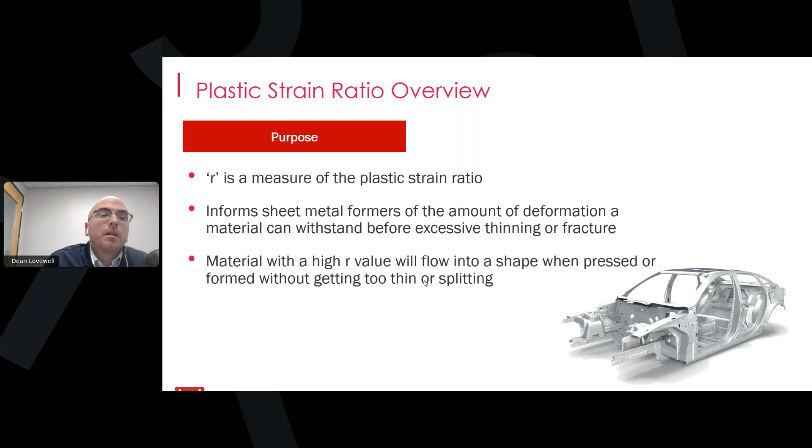R value is determined from a tensile test, the same type of test used to determine other properties like yield strength, tensile strength, and elongation. One notable difference, though, is that the formula used is based on true stress and true strain data.

In practice, we almost always view and discuss tensile data in terms of engineering stress and engineering strain. This distinction matters because while engineering strain is based on the specimen's original dimensions, true strain accounts for the continuous reduction in area that occurs as the material deforms. Similarly, true stress uses the instantaneous cross-sectional area, giving a more accurate representation of the actual load-carrying state of the material.

The reason R value must be determined from true strain is that it specifically represents a ratio of instantaneous plastic strains in different directions, which evolve continuously during deformation. When setting up R value calculations in Bluehill, you don't need to make any adjustments for this difference. Our software automatically converts the engineering stress and strain values directly to the true values used in this calculation.

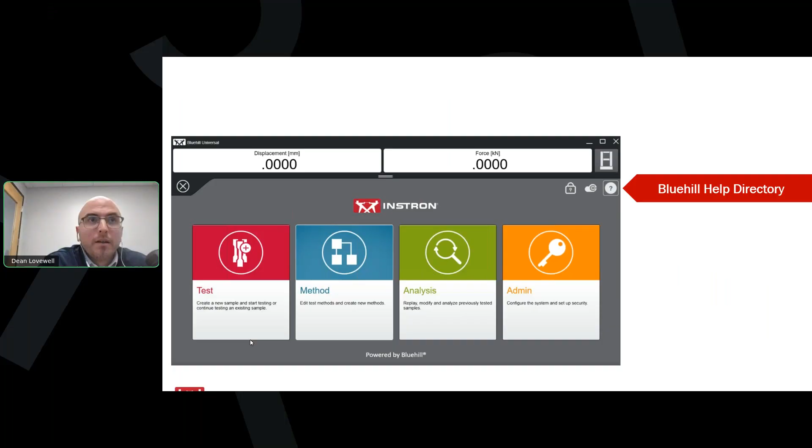These calculations can be confirmed by referencing the Bluehill help file, which you can navigate to from any Bluehill screen. These formulas match the requirements of the common industry standards, and they're particularly useful anytime you need to discuss how a particular material property was calculated.

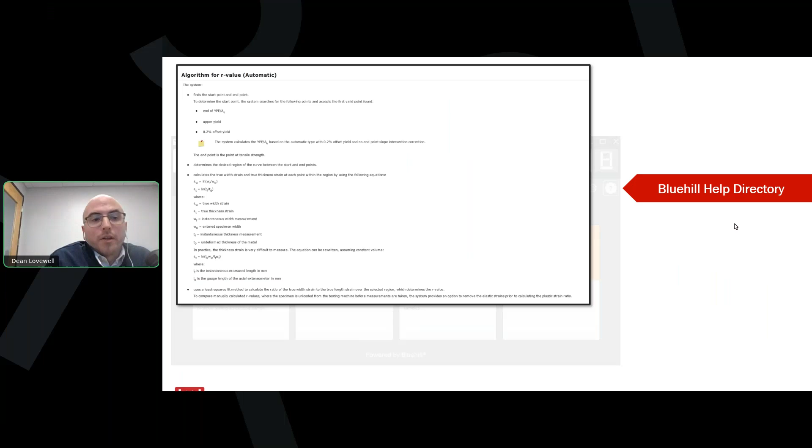One key area addressed in the help file is the question of elastic strain, as both ISO and ASTM require that we remove elastic strains in the determination of R value.

This is really important because, as I mentioned, this is the same tensile test where we're determining tensile strength and elongation. So we're also expecting the test to proceed beyond the range where R value can be determined. This means that we need to automatically subtract these elastic strains during the test. When creating a method with a template R value, this is automatically factored into the calculation.

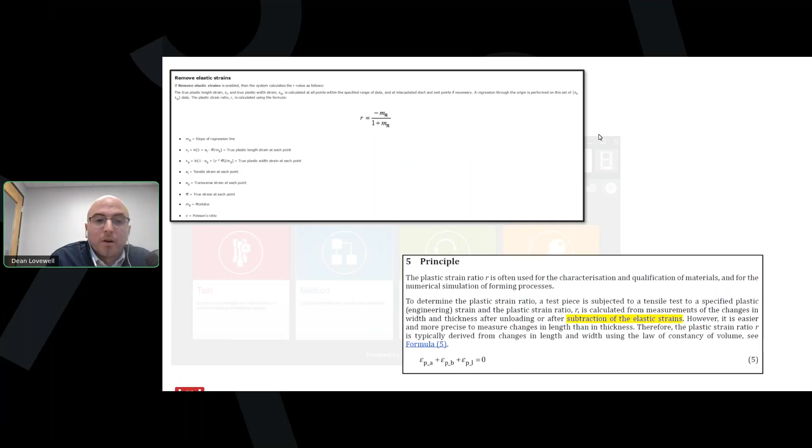However, our flexible software also allows you to build your own R value, in which case you want to make sure you enable the remove elastic strains toggle switch if you're planning to follow the standard for that test.

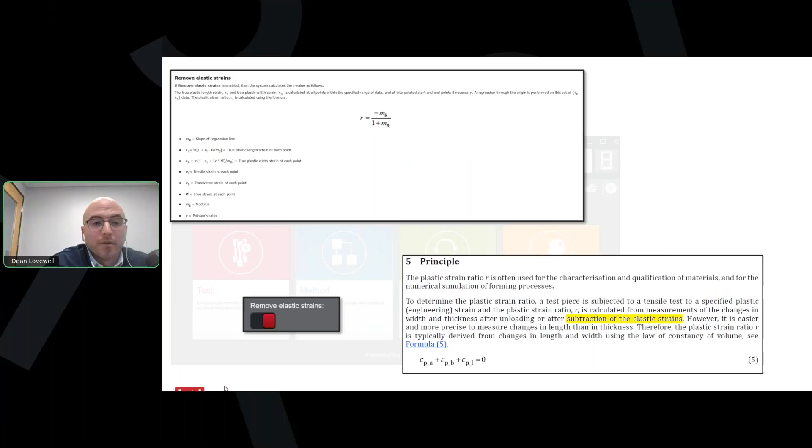Getting back to the calculation, we're measuring how much the specimen's width changes compared to its thickness as it's pulled in tension. This ratio, the width strain divided by the thickness strain, defines the plastic strain ratio.

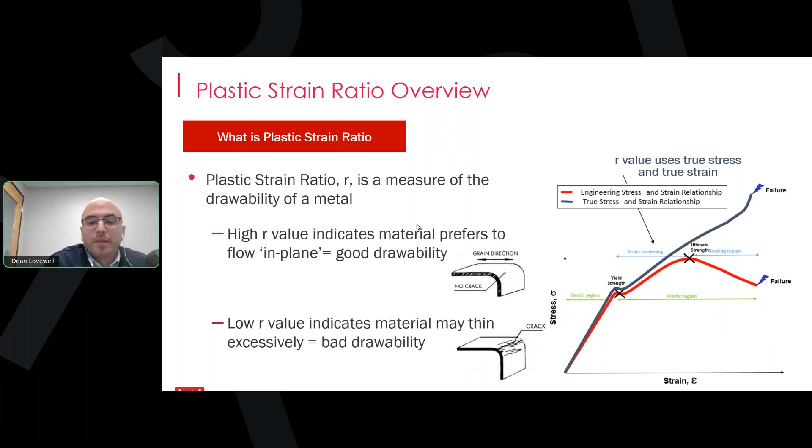In automotive sheet metal, R value is one of the key parameters that tells us how well a material will perform in deep draw or stretch form applications. Understanding and accurately measuring it helps manufacturers predict formability and update their processes.

As you could guess from its name, the plastic strain ratio is determined during the strain hardened region of the stress strain plot. During this part of the test, dislocations within the metal are moving, and as they move, new dislocations are being generated. The rate at which a metal can create and store dislocations, and thus the extent to which it can strain harden, is directly dependent on its microstructure, which is itself dependent on the composition.

This is why some alloys exhibit PLC, some don't, and some only do under specific conditions that lead to a PLC-affected microstructure. One of the reasons why 5000 series alloys are really well suited for automotive structural applications is because their microstructure enables a lot of new dislocations to be generated during plastic flow. This enables them to be significantly strengthened during cold work.

6000 alloys, on the other hand, flow much more continuously. However, while the magnesium in 5000 alloys is in solid solution and able to flow, the magnesium in 6000 alloys is tied up in magnesium silicon precipitates. These precipitates impede the movement of dislocations as well as the creation of new ones. This explains why 6000 series alloys aren't really suitable for applications where a lot of strain hardening is needed to meet final properties.

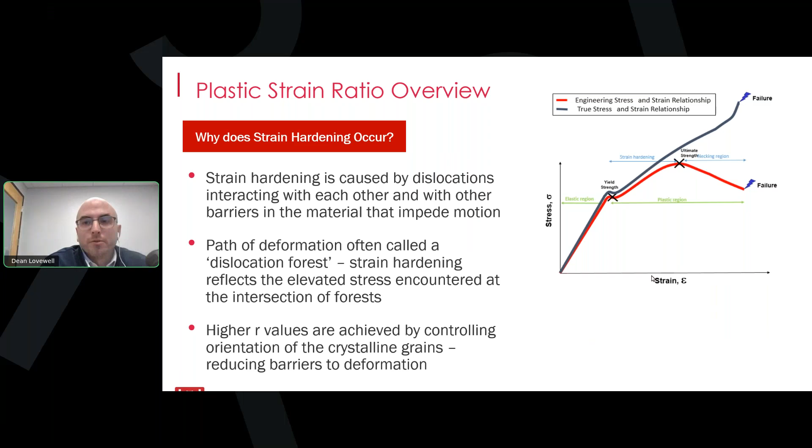The two most commonly used standards for determining R value are from ASTM and ISO. ASTM E517 was originally published in 1981. The normative reference for this standard is E8. By normative reference, I mean that the testing performed to this standard follows E8 in every way, with only the necessary requirements to measure plastic strain ratio included in this document.

This means that for test control methods, specimen dimensions, terminology, really anything besides plastic strain ratio requirements, your lab should refer to ASTM E8. The committee responsible for this standard is E28.02, called the Subcommittee on Ductility and Formability.

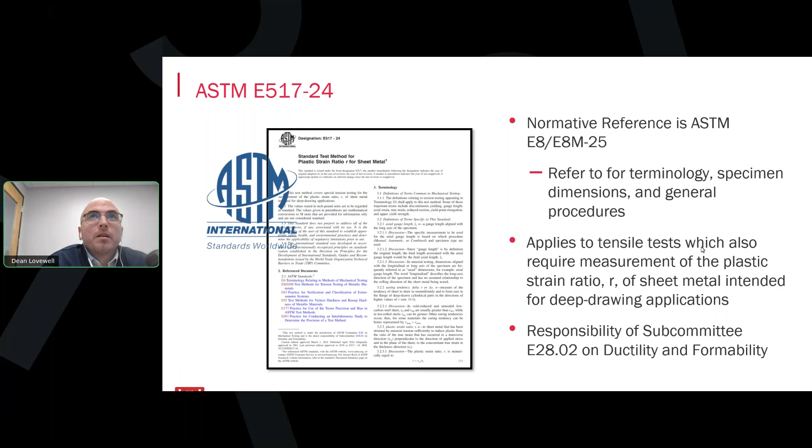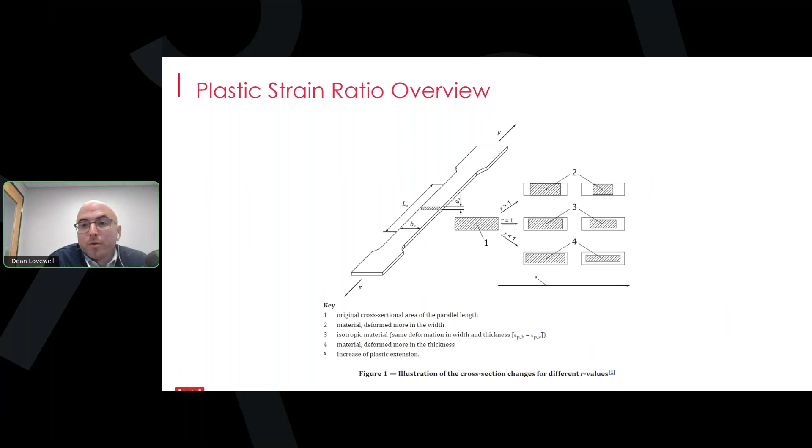In the middle, where R equals 1, the width strain and thickness strain are about the same. Here, the specimen deforms uniformly, both in its width as well as in its thickness. Then down at the bottom, where R is less than 1, this material would spread much less, as it deforms preferentially in its thickness.

Now, this diagram from ISO 10113 -- sorry, that was a previous slide. So as I mentioned, R value is determined during the strain hardened region of the test, after all yield properties have been determined, but before the onset of necking occurs, immediately after tensile strength.

The reason why we don't calculate R value from the portion of this curve after tensile strength is because the formula for R value assumes that the width strain is relatively homogeneous throughout the reduced section. After necking occurs, width strain is localized to the position of the neck, so the formulas we use don't apply.

Now, R value can either be reported from a single location, for example, when tensile strain equals 10%, or it could be calculated over a range like 15 to 20%. The specific requirement here is typically determined by the metal former, as they'll want to know the R value over the expected strain domain used in the manufacturing process.

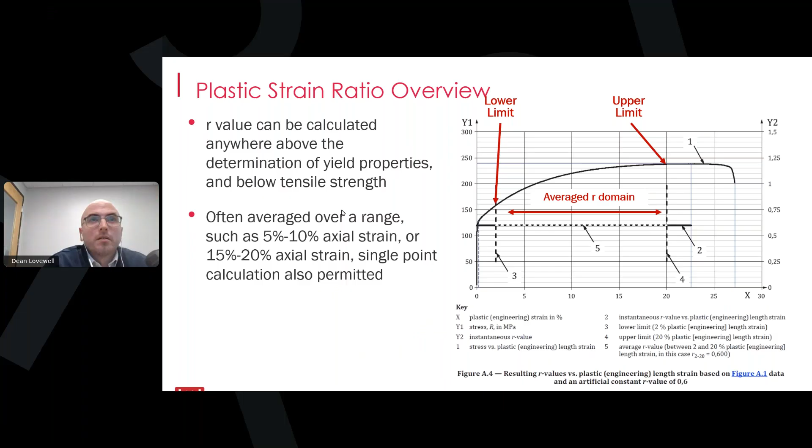Now, the important takeaway that I really want to emphasize here is that once tensile strength is determined, so the maximum force has occurred, and after which you have the onset of necking, we can no longer use the R value formulas from ASTM and ISO. This is because the resulting width is no longer reflective of the width of the reduced section, since after necking, all of the width strain now occurs where the neck has started.

So we see 3 different stages of the test here. On the left, we have a specimen in the elastic region. The strains in this region will be automatically removed for the Bluehill calculation of R value. Then we have the strain hardening portion of the test, showing where B sub 1 would be measured. And then the final specimen on the right, this is post-tensile strength determination.

We see that some necking has developed, and we know that as the test proceeds from here, all of the width strain is going to occur where that neck is. So whether the arms would happen to be at the location of the neck or elsewhere, it's still true that the transverse strain that they are measuring is not representative of the gauge width.

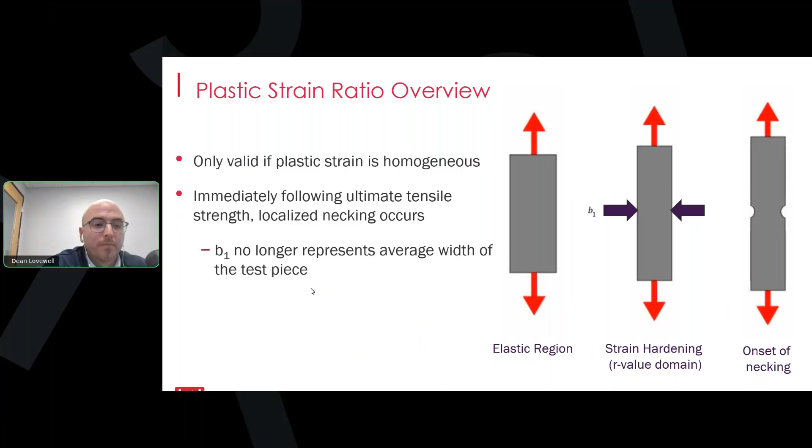So that was an overview of what plastic strain ratio, or R value, is and how it's measured. Now let's look at a material that really complicates our determination of R value.

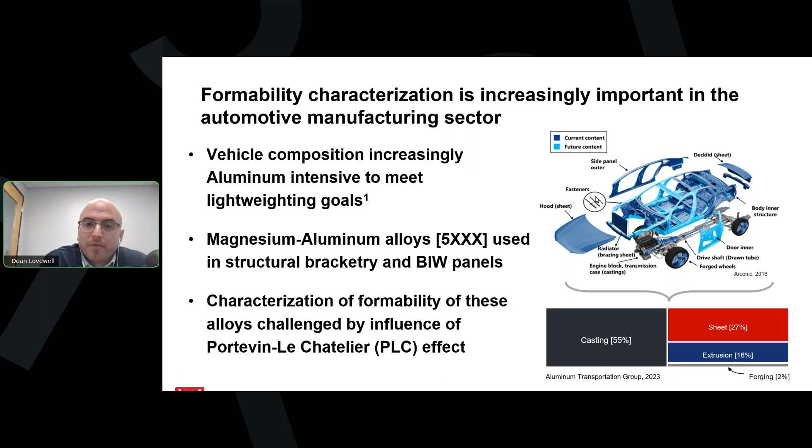One of the trends that we've seen in automotive sheet is a transition from easily formable alloys to more complex alloys capable of achieving higher strengths in thinner cross sections. This includes the transition from interstitial free steels to advanced high strength steels, which I'll touch on at the very end of this webinar. It also includes an increasing shift to aluminum sheet.

Now, aluminum is lighter than steel, and it adds some additional corrosion resistance, which is a really nice benefit for us here in Massachusetts, faced with both the salt from the ocean and the salt on the roads. But it's not without its challenges.

To achieve the strength requirements for structural bracketry and body in white panels for automotive applications, aluminum is alloyed with magnesium to form a 5000 series alloy. This family exhibits serrated yielding behavior as they strain harden, and this behavior is called the Portevin-Le Chatelier effect.

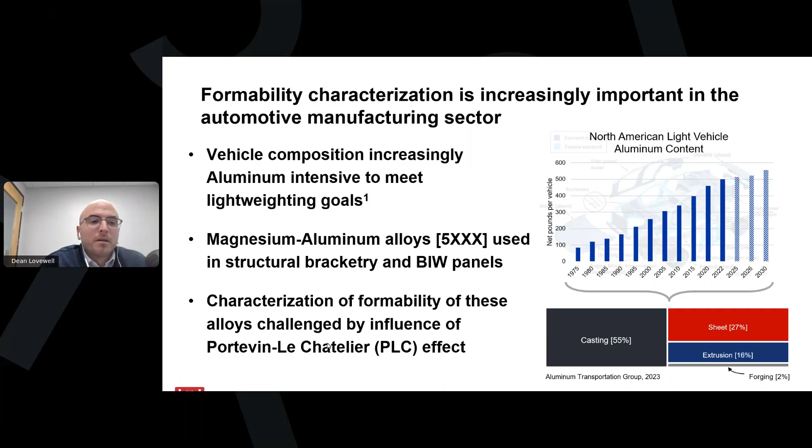Now, the Portevin-Le Chatelier effect reveals itself just after yield, and in this 5182 aluminum, it continues all the way through tensile strength. Since this is the region where formability is characterized, it introduces significant variation to the calculated result, depending on which points are included in the calculation.

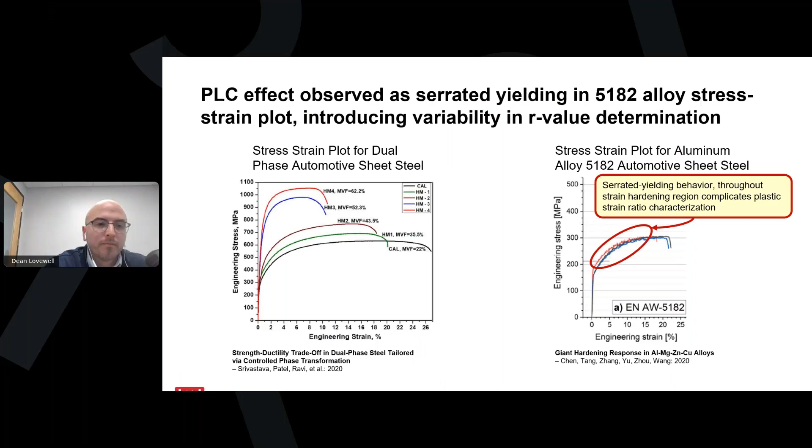Like I mentioned earlier, metal formers generally want a higher R value because it means they can get more draw out of the same material. Having a higher R value means the former will not only be able to obtain the shape they need, but it also means they'll benefit from the strengthening that occurs from the cold work used to achieve that shape.

During tooling design, the R value along with the finished geometry will both be considered for how much work can be done without risk of excessive thinning. For this reason, it's important that the plastic strain ratio falls within a defined window. Non-conforming material, of course, risks being overworked, which can lead to cracking, or underworked, which would result in insufficient work being done to develop the strength desired.

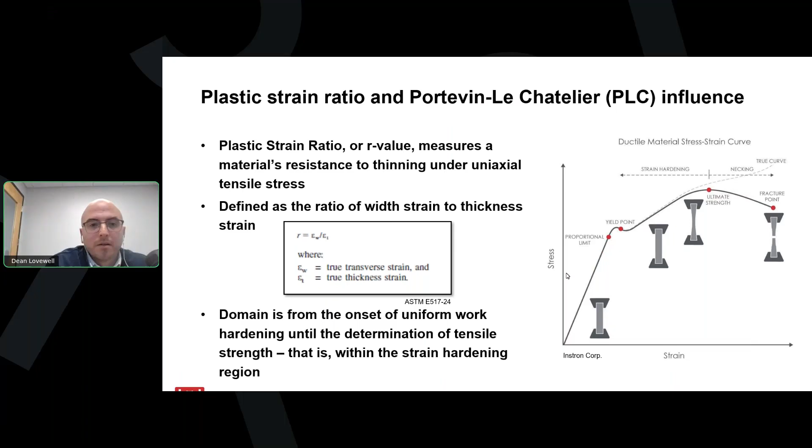Now, although the calculation here defines the ratio as transverse strain divided by thickness strain, testing standards clearly specify that R value is not typically characterized from the direct measurement of the thickness. This is because it would be extremely difficult to measure the change in thickness for thin sheet metals.

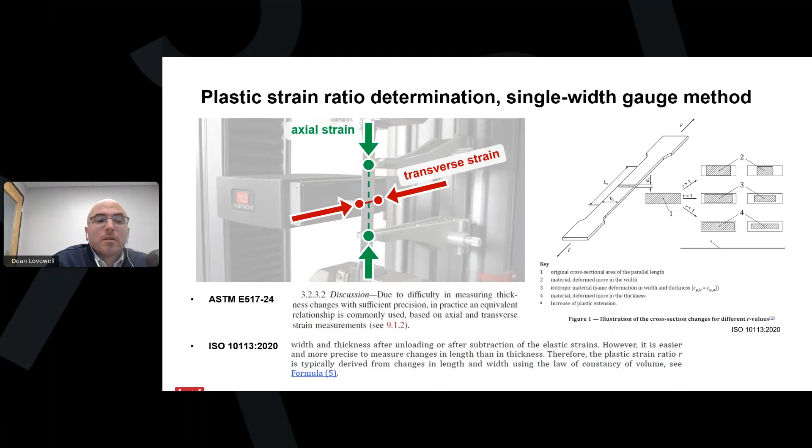Rather, an axial extensometer measures the strain in the length, and a transverse extensometer measures the strain in the width. And by the law of constancy, the strain in the thickness is inferred. This is spelled out in the formulas in ISO 10113, as well as in ASTM E517.

Now, in this visual, we're showing how Instron's automatic contacting extensometer, the AutoX, measures axial strain using the two arms connected to the main unit on the left, and the transverse strain using the smaller arms that meet up with the red dots in this illustration.

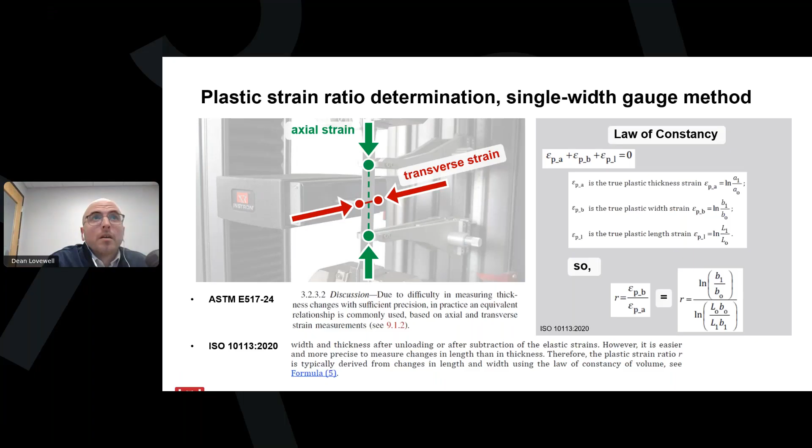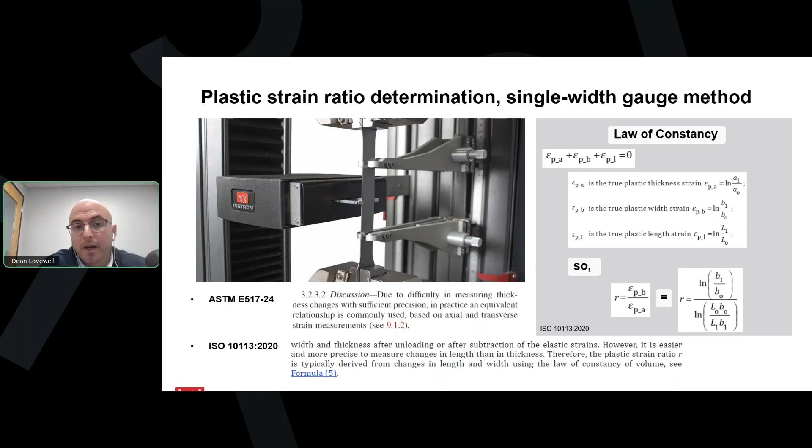You can see that a bit more clearly here if I remove those labels. In non-PLC affected applications, the AutoX with an added-on biax unit is an excellent solution for characterizing formability because its operation is automated, so it's effective at removing the variability that occurs from the less repeatable engagement that you get from a clip-on extensometer.

Now, for materials with stable plastic flow, this method of a single width transverse extensometer is sufficient, since for the domain of the strain hardening region, which we see in this graphic, the width strain is homogeneous. You can see that the area between the green gauge marks reduces uniformly, and so the red dots are sufficient to provide the representative strained width.

And then just another reminder here, you can tell that this is the reason why R values are never calculated past tensile strength determination, since again, after the specimen has received maximum force, it'll neck locally, and those red dots will no longer be representative of the full specimen.

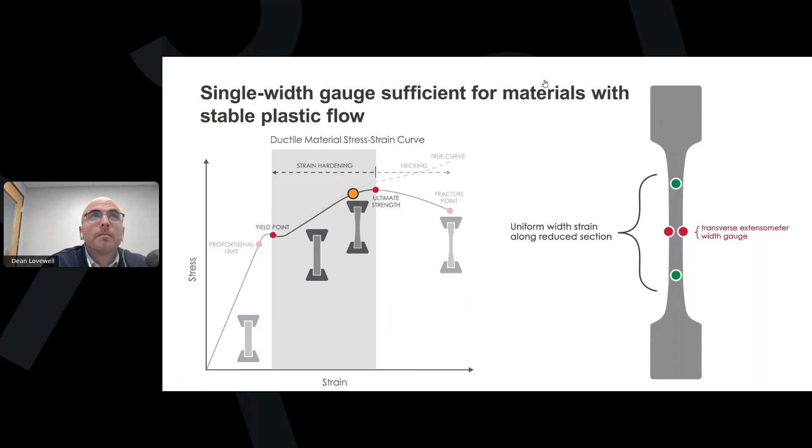So the PLC effect complicates this method by what's observed as jerky flow of the specimen. This jerky flow is the result of magnesium atoms diffusing through the aluminum matrix, pinning dislocation movement in localized regions of the specimen. With dislocation movement pinned, there'll be a rise in tensile stress, and we observe that in the curve.

And that rise continues until the solute atoms become depinned, in which case they flow and the stress is lowered. This occurs repeatedly, and the striations are even visible on the specimen itself. These striations are called Luder's bands, and they represent localized regions of plastic deformation.

What we're seeing on that specimen in this picture is showing the periodic mismatch in surface condition between the regions of localized strain. Now, not only is this bad for surface quality finish, but it also really complicates our formability testing.

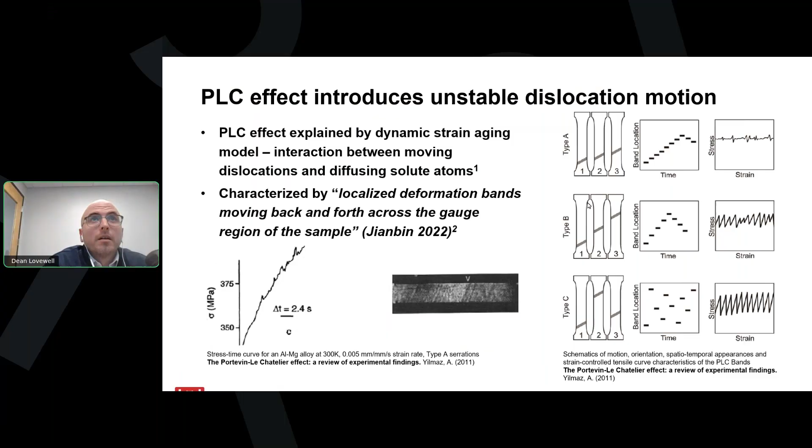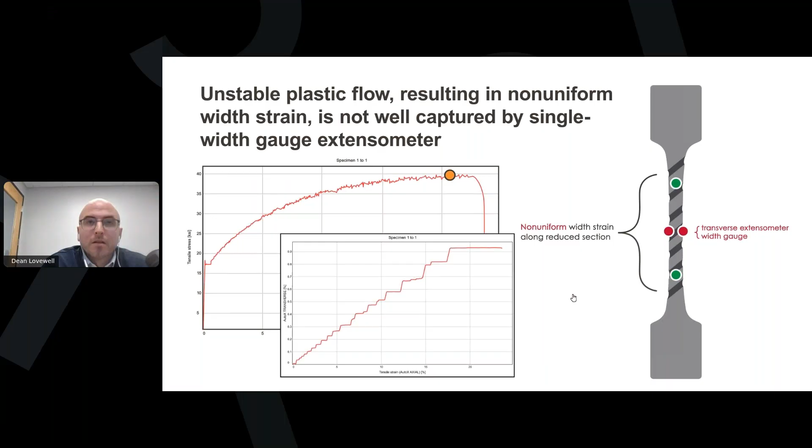they diffuse toward the tensile region of edge dislocations in the metal. Here they pin further dislocation movement until the bondage of those solute atoms itself is broken. Now, while they're pinned, we see the stress rise. And then when they break free, we see what's described as a plastic avalanche of the localized band. At this point, there's a burst in the dislocation movement and the stress suddenly falls.

And then again, as this process repeats, this is what we observe and call the Portevin-Le Chatelier effect, more commonly the PLC effect. And again, the reason why we see this in 5000 series alloys is because the magnesium atoms are in solid solution with the metal, and so they're able to travel until they're pinned.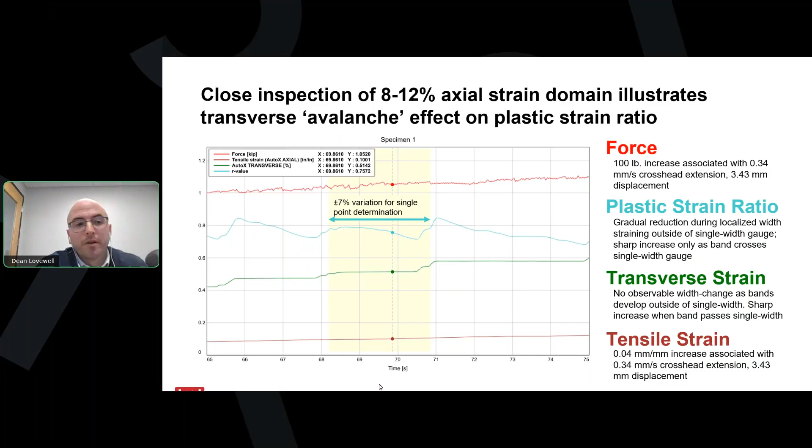And this behavior is consistent across the 5182 alloy specimens we tested. In speaking with producers at the time, we were told that in order for them to ensure they met formability requirements, they essentially had to plan for the very bottom of the range of R value in order to avoid producing non-conforming material or material that required multiple retests.

Now, in order to do this, they would work to lower composition levels of magnesium, although this would prevent them from missing their R value requirements. It meant that they were sacrificing strength to do that. And still, they were delivering material with lots of variation in the certified value.

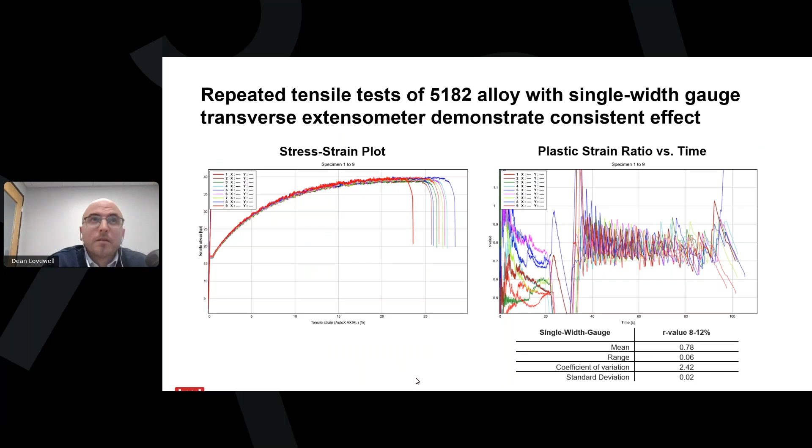Here's a look again at those same tests. We're looking at the contributing axial strain on the right and transverse strain data on the left for these tests. This really demonstrates the consistent unpredictability of the transverse strain behavior that's directly contributing to the variation in our R value. Notice that my plots are all offset so we can easily see how each test progressed relative to the others. This is possible using a simple toggle switch in Bluehill that I use regularly when reviewing test-to-test data.

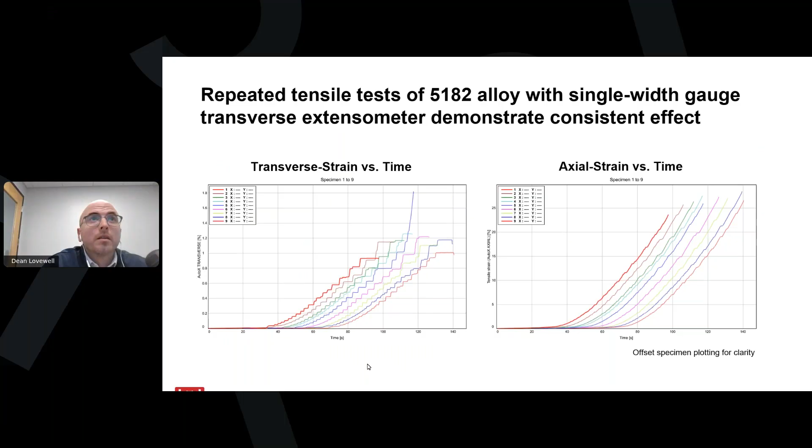For contrast, I wanted to show a similar test done on a 6000 series alloy. Specifically, this is 6063, and it does not exhibit the PLC effect. As I mentioned before, though, it unfortunately doesn't exhibit a lot of work hardening. For this alloy, we see smooth stress strain plots and the accompanying smooth R value determinations, with very little variation in plastic strain ratio test to test. The coefficient of variation for R value for this alloy is just 0.38, much lower than what we saw for the 5182 alloy.

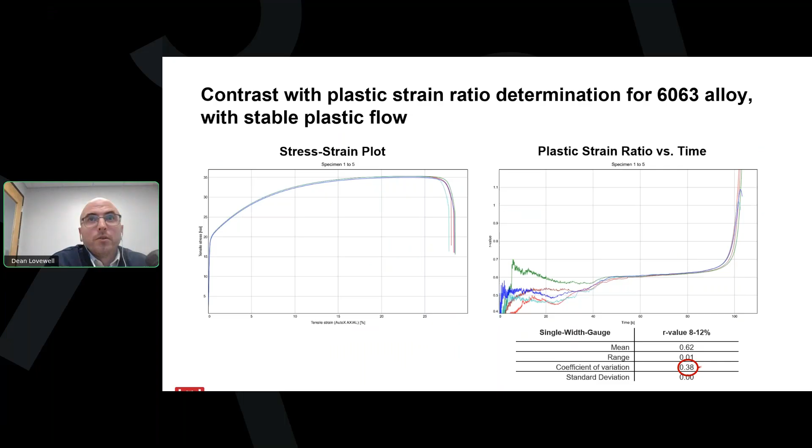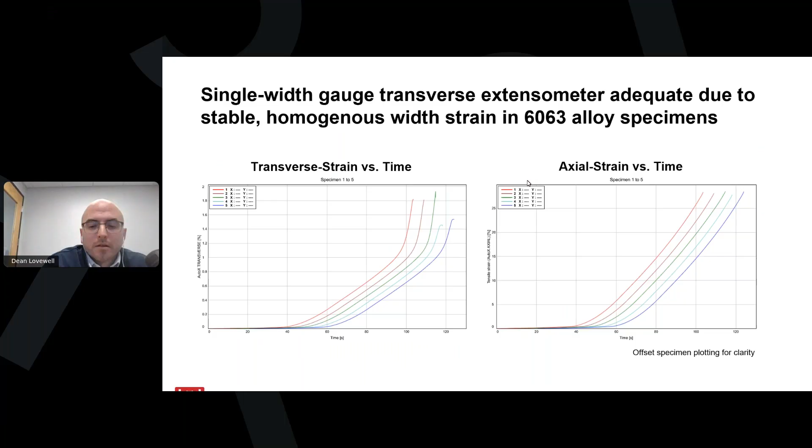Looking at the transverse and tensile strain data individually, which we can do simply by creating additional Bluehill charts, they're both smooth, which is how we get the smooth R-value behavior. Looking very closely at the domain of the plastic strain ratio, we see there's very little variation across this plot and almost no variation in the single point calculation.

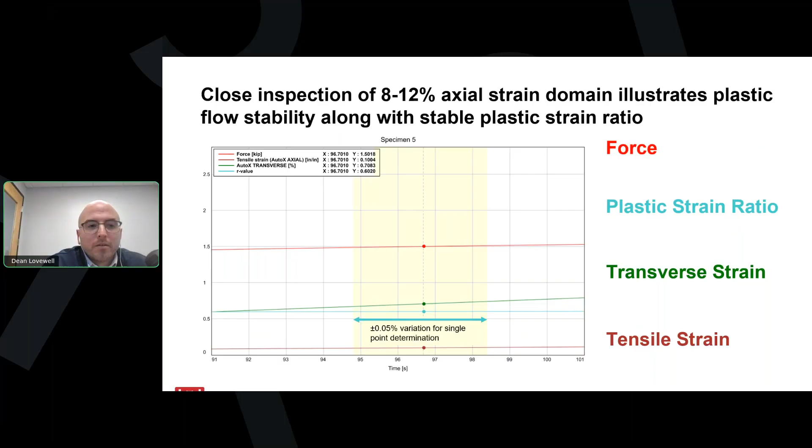So the question we asked ourselves was, how could we include the width strain behavior all along the reduced section so that we'd not only get a smoother transverse strain curve, but we'd also get more representative R values that would be more repeatable test to test, lab to lab.

The solution we developed was a video extensometer that, instead of tracking just one gauge width, actually tracks 32 gauge widths along the specimen. This captures the width strain behavior wherever it happens within the gauge length, and it averages the result into a single value. This Instron-developed technology is called AVE3, and this approach is accepted both by ISO and ASTM.

The most recent version of 10113 was actually published with language recommending this approach as a way to obtain more reliable characterization of R value.

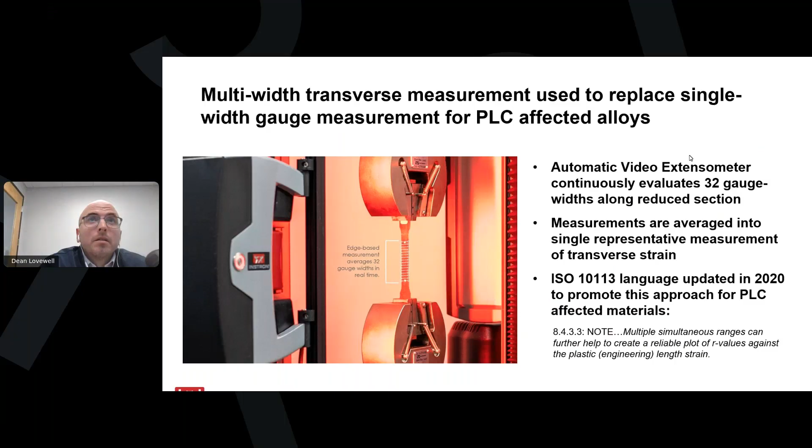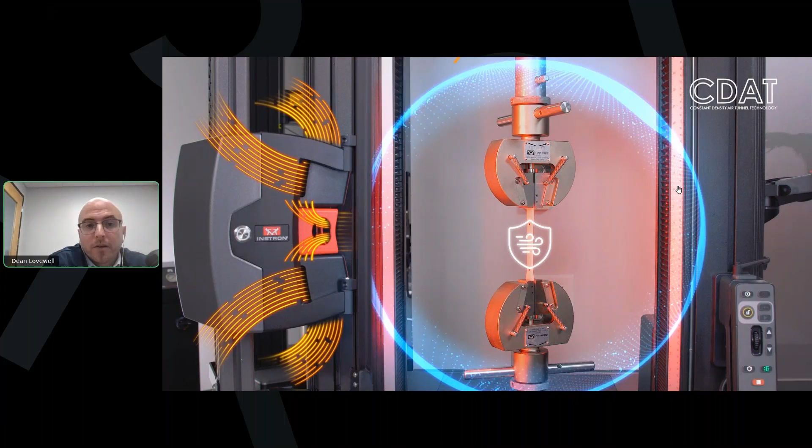Another great advantage of using the AVE3 technology is that you also gain the environmental conditioning capability included in the AVE3 extensometer. This extensometer uses Instron's proprietary technology called CDATs, or constant density air tunnels, to control the airflow between the camera and the specimen. By controlling this airflow, we're able to reduce the noise in your strain data, delivering the most reliable, repeatable strain data for a video extensometer.

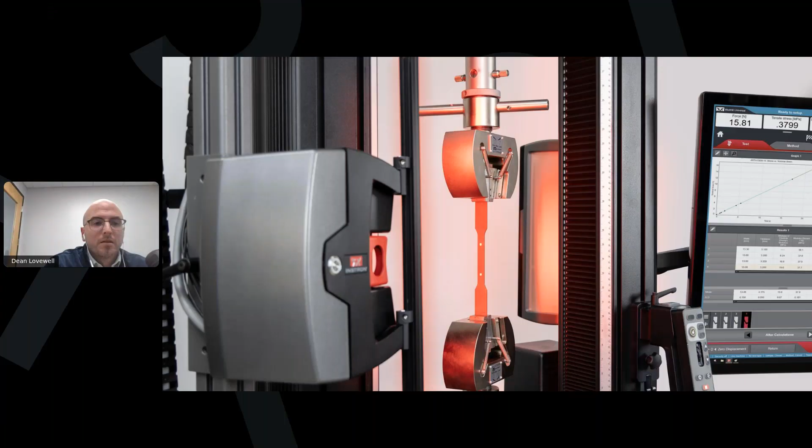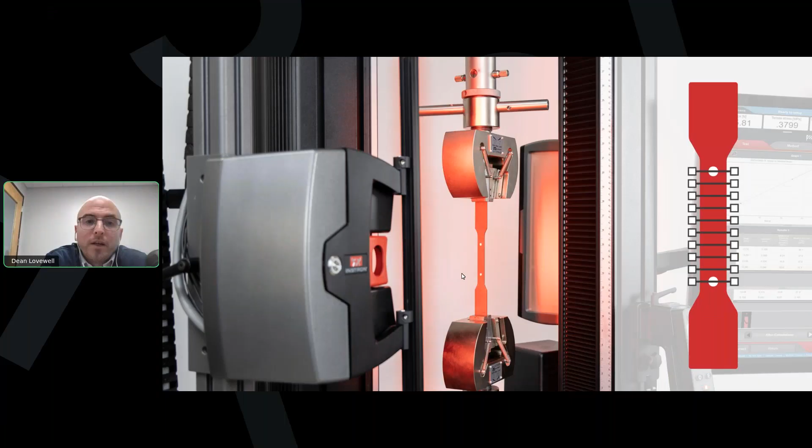With the AVE3 technology, which again is an optional feature to add on to the AVE2, this technology uses markless edge detection to track the width strain across all 32 gauge widths along the gauge length. This provides the highest resolution width strain, ensuring that wherever strain occurs, it'll be captured and averaged into the result, giving the most repeatable R value determination possible. And by using markless edge detection, there's no need to apply any transverse markers or flags.

So now let's look at the effect of using this method. Although we still see some of the characteristic jerky flow in the stress strain plot, the important thing is that the oscillation in the plastic strain ratio has been dramatically reduced. This is because the transverse extensometer is now taking into account the localized width strain across the reduced section and averaging it into a single result.

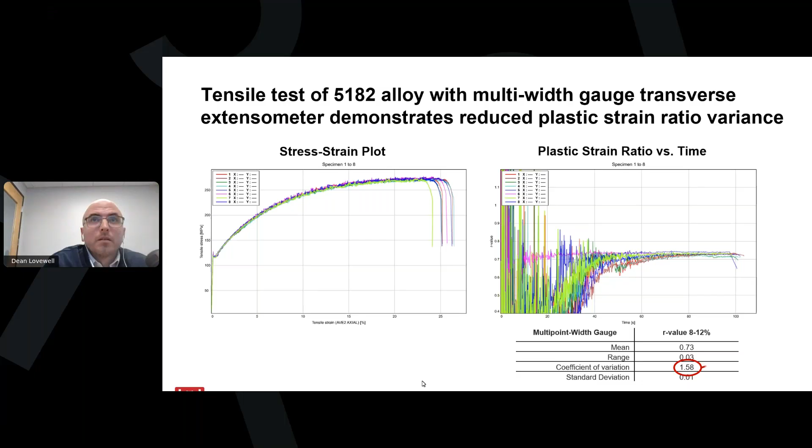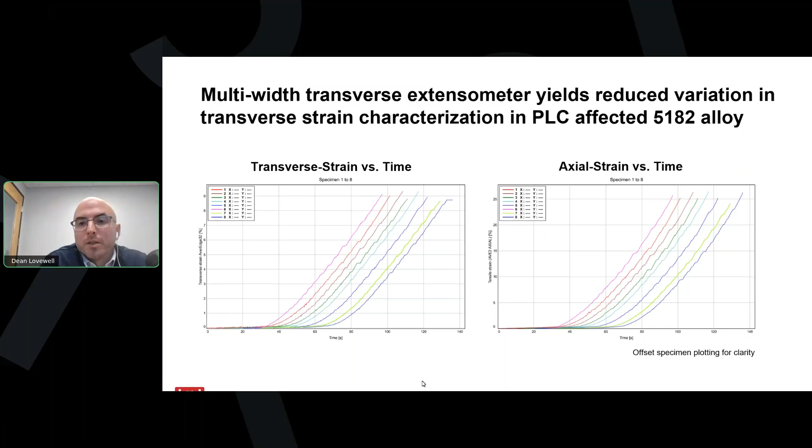Here we see that the plateaus in the transverse data on the plot on the left are significantly shortened, because we're now calculating width strain with much greater resolution along the gauge length.

Zooming in on the zone relevant to plastic strain ratio calculations, we see much smoother transverse measurement. The variation in R value has dropped across the zone, and now you have a much more reliable indicator for single point R value calculations.

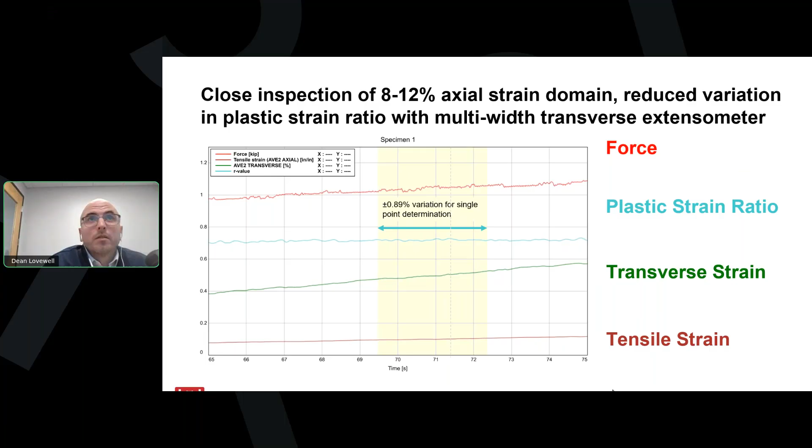Here's a look at R value calculated throughout the test, along with the corresponding transverse and axial strain. Much less variation than with the single point method.

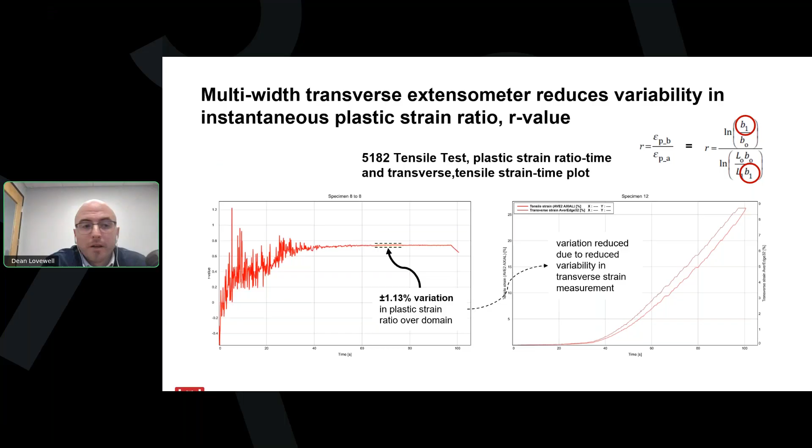So in summary, here's the side-by-side improvement going from a single width gauge measurement to a multi-width gauge measurement. The meaningful effect this has for the producer is that they can dial in their magnesium composition for improved strength while maintaining confidence that they'll get reliable, repeatable R values, compliant with the latest test standards.

Now, I should note, although 5182 was the alloy of choice for this research, this approach is suitable for improving the reliability of formability characterization for any alloy exhibiting the Portevin-Le Chatelier effect, or the PLC effect.

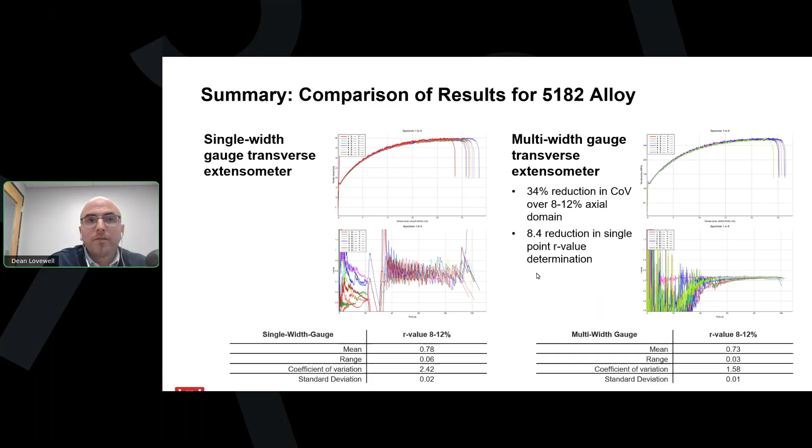As a bonus, I mentioned earlier I'd touch on advanced high-strength steels. We also see benefits of applying this method to complex ferrous alloys, although for a very different reason. Advanced high-strength steels are not PLC affected, but their complex microstructures generate more heat during plastic deformation, which tends to localize strain in the specimen, causing non-uniform deformation. Depending on where this localization happens, width strain will vary relative to the location from a single point extensometer. By using the multi-width method, these results become much more repeatable.